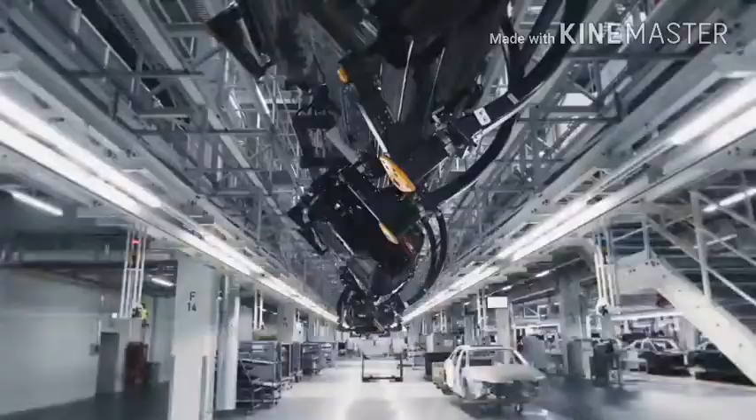The challenges in production engineering for automotive manufacturers are that more cars need to be produced in a shorter amount of time, while customer requirements are becoming more and more individualized. At the same time, manufacturing complexity is increasing, and there is a greater need for cost efficiency. The TIA portfolio with the TIA Portal is the greatest lever for achieving these goals. The TIA Portal provides the engineering basis for automotive standards.

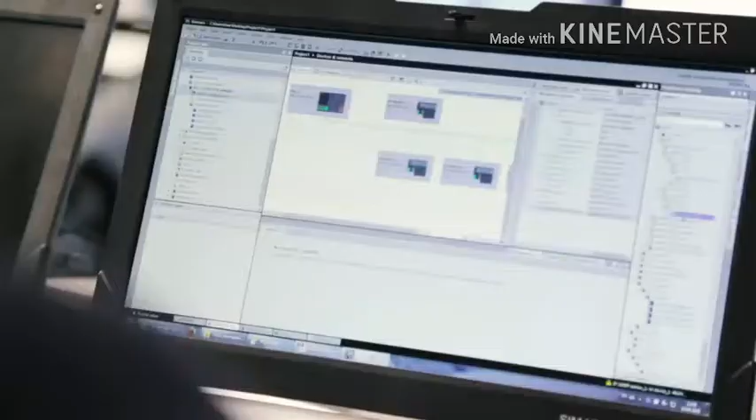At the same time, the TIA Portal is an engineering framework that we use to engineer and program the controller, visualization systems, drives, and safety components. There are many examples of how the automation portfolio and the TIA Portal help automotive manufacturers. For instance, the integrated security concept for access and data security, as well as the integrated library concept in the TIA Portal, make it easier to exchange data between the automakers and the line builders.

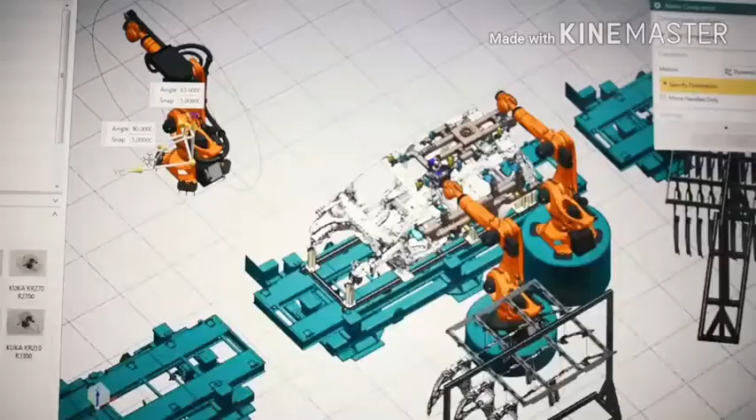Production engineering provides access to the digital enterprise. It establishes additional requirements for connecting to the Teamcenter data backbone. The situation today is that the data must be transferred manually from product design and production planning to separate software tools. We will change this in the future. Data from the mechanical, electrical, and automation systems will be automatically merged and made available. This can significantly reduce the time and effort required for engineering.

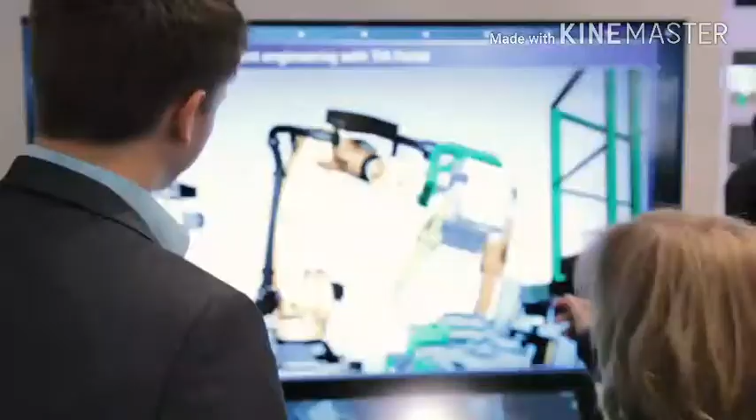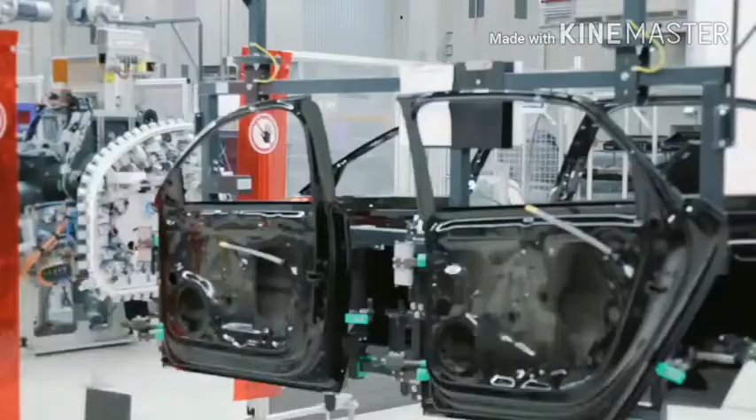We have the ability to use our virtual PLCSIM Advanced controller to perform virtual commissioning before production even begins, and also to simulate the equipment. This can increase overall quality and reduce susceptibility to errors. Siemens is the right partner for the automotive industry because we offer a complete portfolio, from product design to services, based on the Teamcenter data backbone. This gives customers full data consistency and maximum transparency.

I'm Becky Miller. I work at GE Aviation, and I'm a quality control engineer. Manufacturing is great because it lets you use your technical skills, your problem-solving skills, and your communication skills. And at the end of the day, I get to see a plane fly, and I know that I'm a part of that.

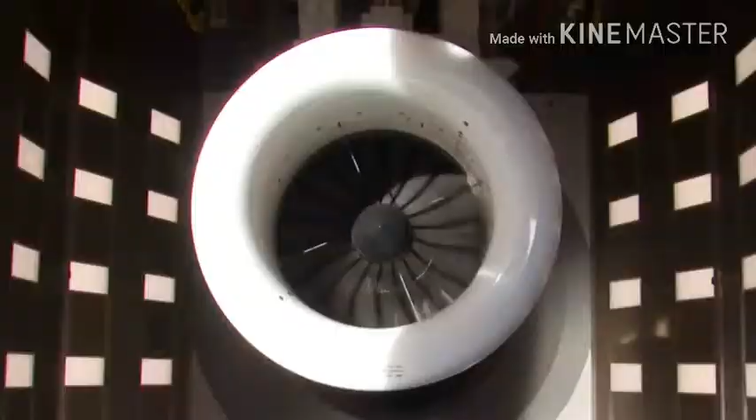The Evendale, Ohio facility is GE Aviation headquarters. We do engine testing and development, we do manufacturing, we do assembly, we do sourcing, and we have our materials support team here as well as our corporate headquarters. We make very large parts at GE Aviation. Some of our parts are as large as 72 inches in diameter. And on a part that large, even an error as small as 5 thousandths, which is about the size of a human hair, can make a difference.

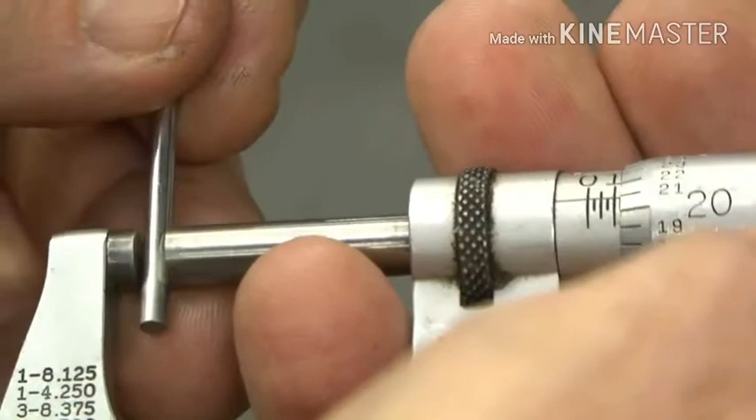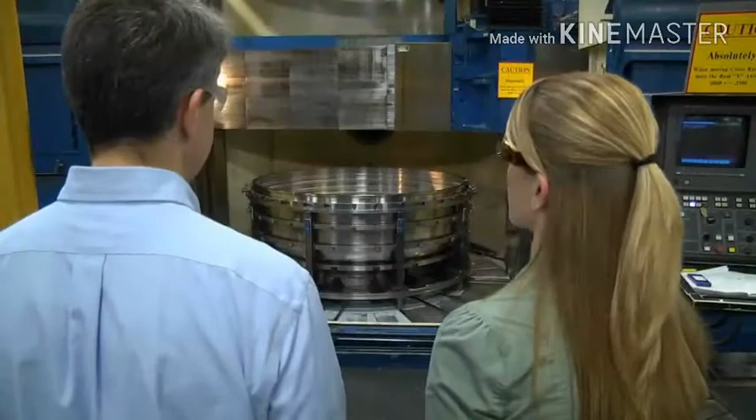I enjoy what I do every day. Every day I can go home and feel like I've accomplished something because there's always a new challenge for me to tackle. I think the false impression that people get about manufacturing is that they think that my job revolves strictly around machines or that I sit at my computer all day and analyze data. My job is actually very people-oriented. I work with groups of people every day to resolve problems.

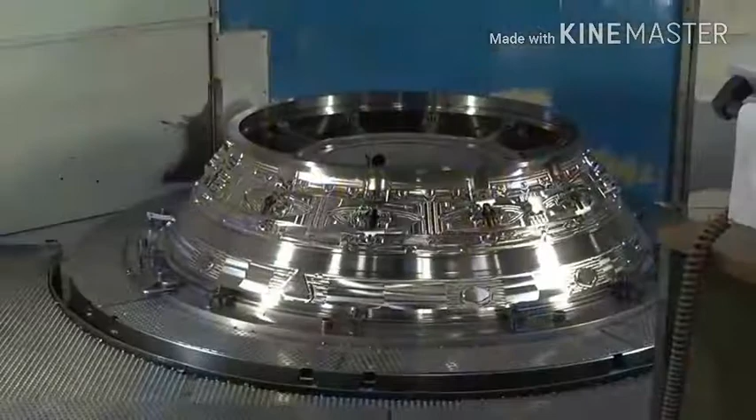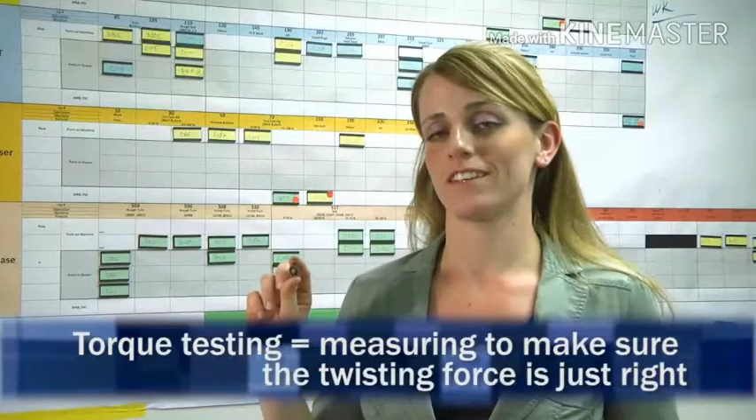Even a small part can have a huge impact on the engine. This is a nut plate. It goes on our low-pressure turbine cases. This little part is so important that we decided we needed to do torque testing to make sure that this doesn't fail when our assemblers in North Carolina put the engine together.

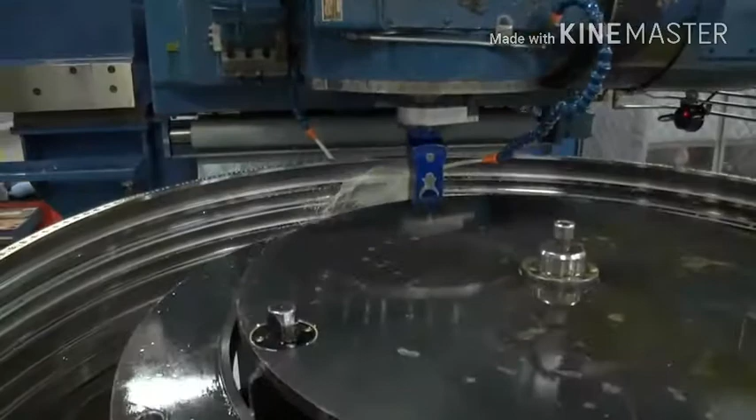To get everyone to work together on a problem, typically I like to make sure everybody agrees that there is a problem. So an operator and the methods engineer, they have to work together, and if they both think that there's an error with our process, then it's a lot easier to go tackle that issue. I also perform product audits on our part. That is checking every characteristic of our material to make sure that our products are conforming when they go out the door every day. Becky, this is a big part.

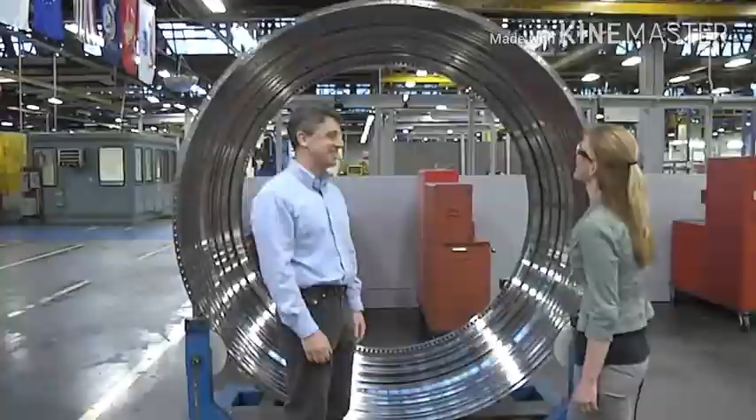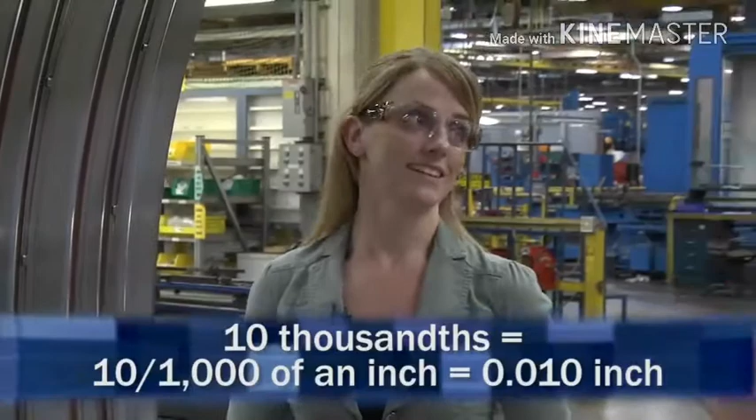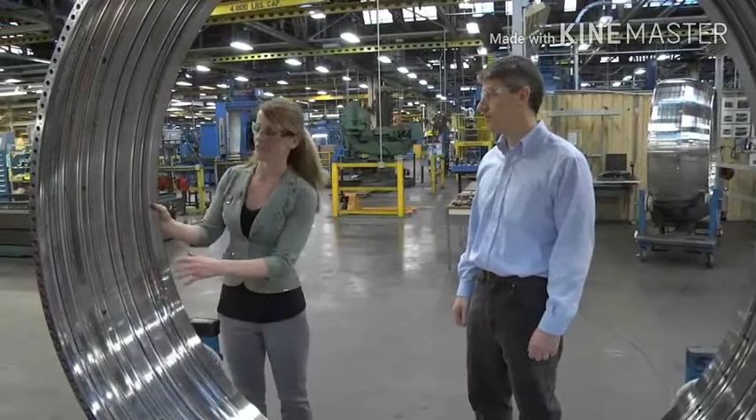What is this? This is our low-pressure turbine case. This contains nozzle segments and assembly. The tolerance on the wall thickness is about 10 thousandths. So a few human hairs. Yes, that's all we get. And you have to control the size of the wall to that precision. It's a structures case, so we've got to make sure that at the end of the day, everything will fit inside of it and nothing can escape it if something were to go wrong.

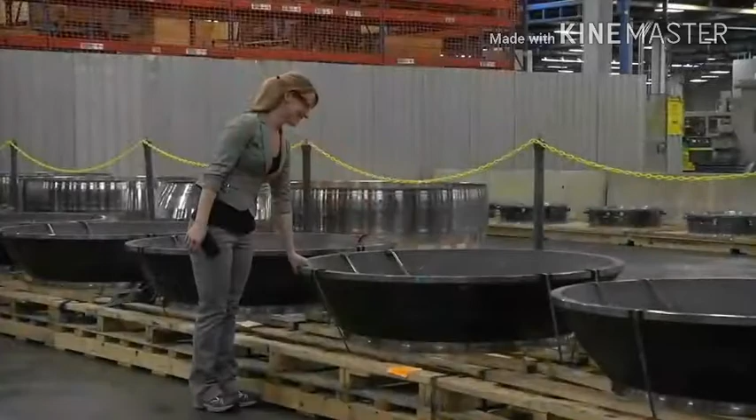The whole quality system is based more on our tight tolerances. It's not so much to do with the large features of the part, it's all the little ones that actually matter. I'm seeing sort of a shiny metal surface here, but I know it doesn't begin that way. What does this part look like when it comes? It actually comes in as a very large black forging. So there's a few more inches of material. It's this basic shape, but doesn't have all these features in it. What steps happen to get it to look like this?

It starts in our turning processes. The turning basically makes the thickness of the case, and it makes all these distinct features on the inside. After all the turning is done, it then goes to our milling operations where we get our bolt holes put in, and then we have just a little bit of assembly on this part. Nozzle segments actually slide into these. And that's important because the nozzle segments are supposed to be of a certain size, and we want to make sure that everything fits properly in assembly.

You are a quality engineer in the large parts area. Do you like that assignment, working on the big stuff? I enjoy that our parts are so complicated because every day you see something different. We make these features on these machines every day, 2 to 3 parts a week, and you still see a challenge at every step. And at the end of the day, I get to see a plane fly, and I know that I'm a part of that.